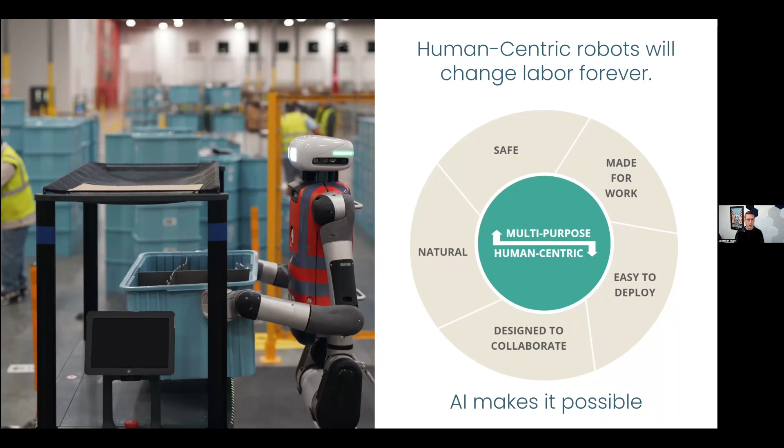Another point I'll make, at the start of the talk here, is that we're really in a third revolution in robotics. The first one I would identify starting in the 60s with the very first manufacturing robot, the very first robot that was commercially deployed. These were big robot arms bolted to the floor, pick and place - pick something up in its workspace, set it down, welding, painting, that kind of thing. And that market continues to grow. That's great, but that started a long time ago.

Then maybe in the 2000s, we started to see autonomous mobile robots.

Now there's things that are rolling around and doing things, but still the whole environment, the whole space is designed for the robots. You have to really modify your environment so that the robots can operate in the warehouse, in the location where these mobile robots operate.

But now what's happening is we're able to have robots exist in our space. We're able to have robots that are human-centric. And because so many tasks are designed and built around us, that is a huge opportunity for being multi-purpose. Now that these robots operate in our space and can do the workflows that many people can, and there's so many different tasks and workflows designed around people, Digit can be multi-purpose.

That's pretty exciting, and that's part of this whole new era. Now, another thing I'll point out, talking a little bit about the AI question, all of these images are generative. These images are from an AI that created them from a voice prompt where we just said, show us a humanoid robot working in a warehouse, and then we get the image over on the left. That's pretty amazing and still quite new, and something that's going to allow us to ask robots to just do useful things in the space and talk to them in kind of a natural language.

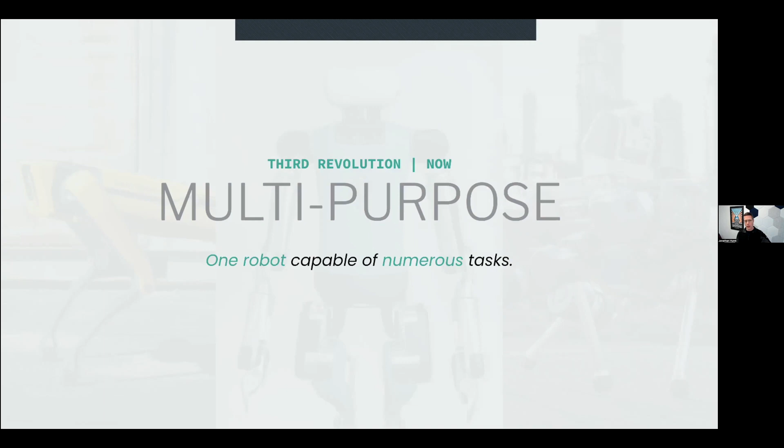We still have very nice cameras for photography that specialty photographers use when you really need top image quality. But the vast majority of photos taken in the world are on a smartphone. And a smartphone, of course, is multi-purpose.

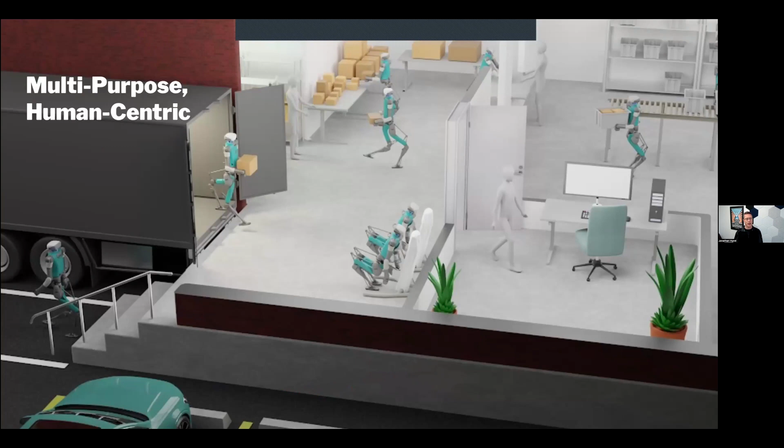Now, what we're talking about with robots is a machine where it's like the App Store, but for labor, but for doing the physical things in the world. And so having one robot that can do, say, unload a tractor trailer, like in this image, and then head down those stairs off to go deliver packages out of an autonomous vehicle, and then be sorting totes on those bins, and then also be interacting with a person. This is in a human space, in a human environment. The robots can come in and just start to do all this stuff. That's when these start to become part of daily life, start to become very, very common, and really, really become useful.

So what does it take to get there? Okay, it's an exciting vision. We've wanted this for hundreds of years as humans.

First, I would say it starts with the hardware. The software is limited by the hardware. The hardware is the interface between the AI and the world, and AI is a brain in a box until you've got hardware that can actually physically interact with the world. And it isn't as easy as making something that looks like a person and putting motors on the joints. It's also moving like a person and getting true dexterity, which is really a holistic combination of the physical hardware and the software that's controlling it.

And then another thing that I think a lot of people, especially in academia, may overlook is commercial engagement - it's an absolutely necessary piece of this in order to have a use case, an important, valuable application that has metrics and requirements to it.

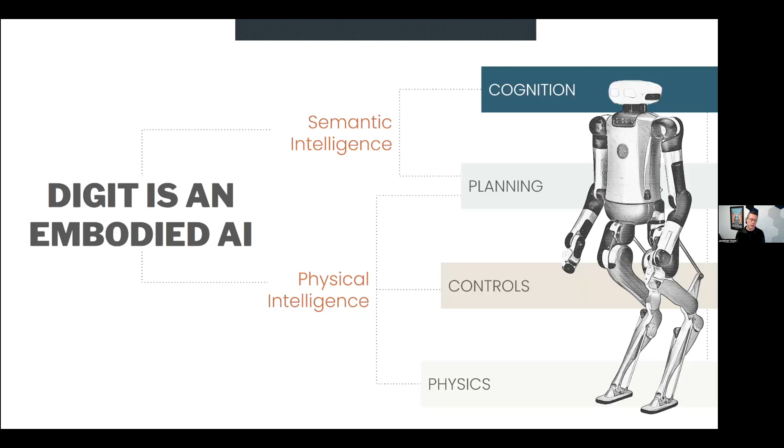And really, that's kind of like, what can the robot do? Can it handle stairs? Can it pick up a cup? Can it open a door? What kind of dexterity does it have? Can it go down a hallway? What can a robot do - that's the physical intelligence.

But then on top of that is the semantic intelligence. That's what everybody's getting so excited about right now with large language models and chatbots and so on - what should the robot do? And honestly, a couple of years ago, if you'd asked me, I would have said Agility's founding everything on the physical intelligence. It's going to take decades of having robots in the physical world to build up our semantic intelligence. But it turns out if you just scrape the internet for all of its information and put it in a giant large language model, you end up with that human context, kind of the instruction set.

So you can say, hey Digit, clean up this mess. I'll show you a video of that. And then Digit knows what to do and can break that down into a set of instructions that then the physical intelligence part of the stack can actually execute on.

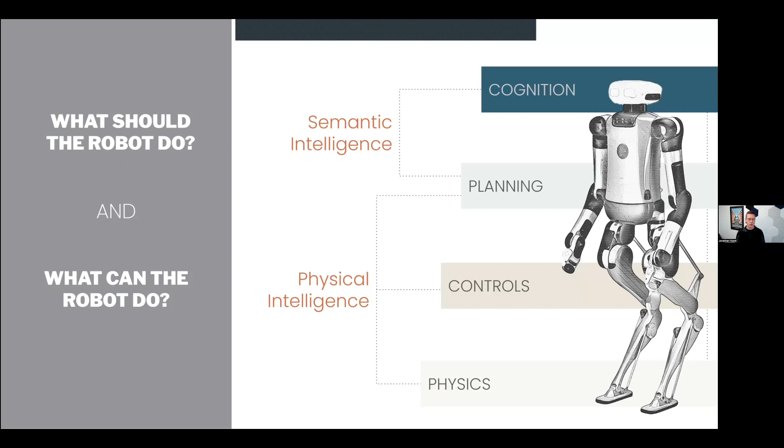Starting at the bottom of the stack, the physics. Physics really matter a lot. When we talk about locomotion, we started with understanding biomechanics. I don't care about where individual muscles are, whether there's a knee joint, or the heel-toe details of morphology. We looked instead at what are the ground reaction forces. When the foot is on the ground, you can measure the forces on the ground. What's the center of mass motion? And what is the basic behavior divorced from the implementation details of an animal? Because we're building machines - we don't have muscle and bone, we have aluminum, electric motors, and computers.

So first understand biomechanics - this applies to manipulation as well, studying how people grasp things. I might make this point a few times, but the morphology or shape of the machine is just the tip of the iceberg. It's one symptom, one small piece, and not even necessarily the most important piece.

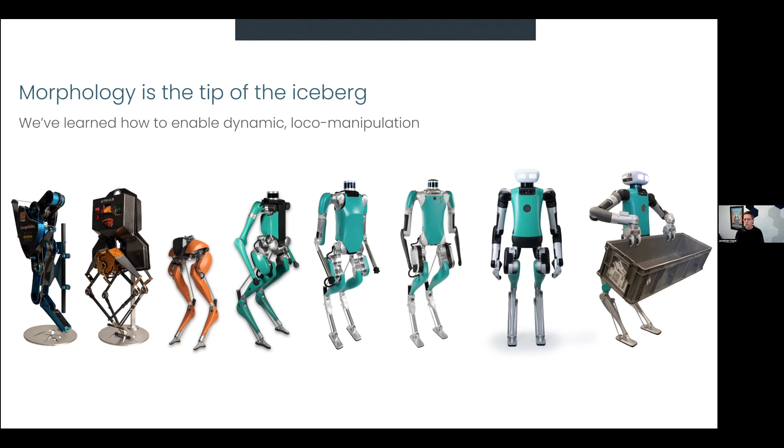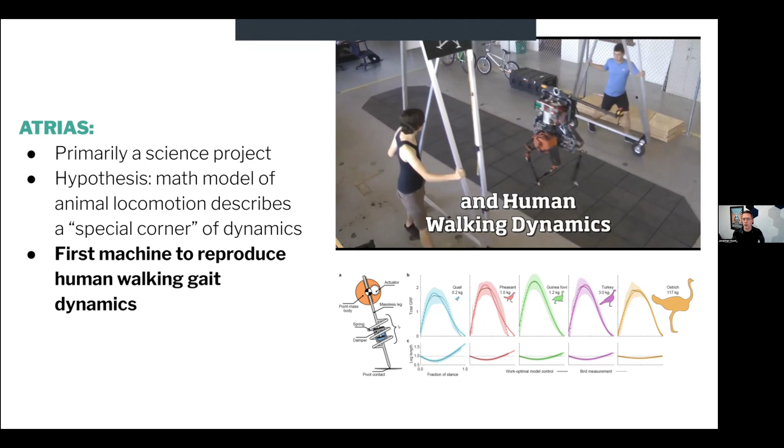Here's a nice video of ATRIAS. ATRIAS was a science project meant to reproduce the dynamics we observed from animals - this is several years old. The graph on the bottom is a collaboration with Monica Daley from the Royal Veterinary College, where we measured the ground reaction forces of many different ground-running birds at different scales. We wanted to make sure we weren't getting some nuance of a particular specific animal or bird - we wanted to understand what is true across all animals, all bipedal locomotion, and capture that into a machine. The hypothesis is that this math model really describes this special corner of dynamics, the self-stable behavior of locomotion.

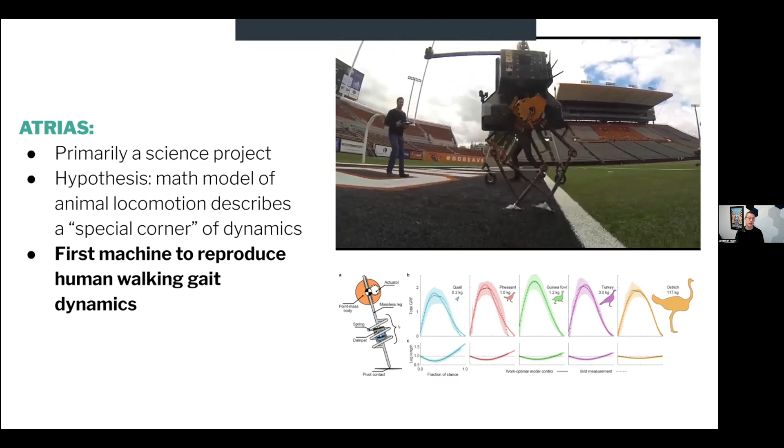So this is one symptom, one thing that shows us we're capturing the right physics of locomotion. The other is, hey, it's walking and running outdoors over all kinds of terrain. It's totally blind - there's no planning, no camera, no perception - yet we can go over all of this terrain. So there is this special corner, this self-stability, that we're getting by capturing the right physics of locomotion.

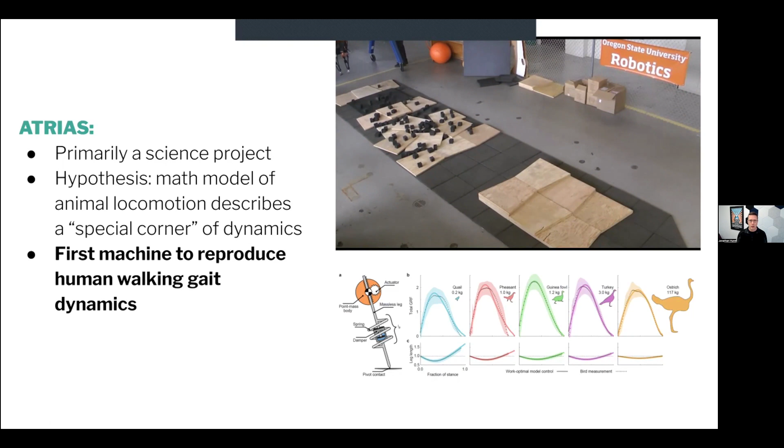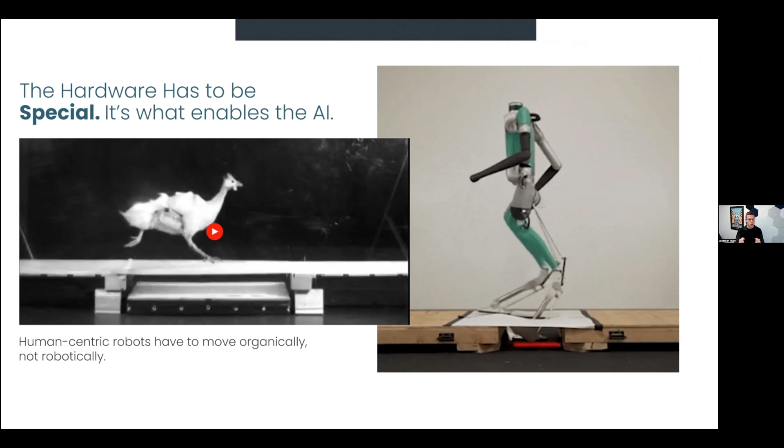So these are the foundations. I want to point out the hardware, the physical mechanical pieces of the robot - they have to be special. You can't just put the motors on the joints. You see how this robot is moving organically; it is not moving robotically. This is not a position control trajectory. It's much more about forces that we're applying on the world, so we need special actuators that are actually controlling the force, and able to control the force at a high rate. It's about impedance, compliance, and flexibility when it makes unexpected contact with the world. They have to move organically, not robotically.

Only if you have your hardware foundation and your physics integrated in that way can you hope to then learn how to do natural walking and running gaits. Again, this applies to locomotion or manipulation - I don't think there are that many differences between the two. I think of it all as one kind of loco-manipulation challenge.

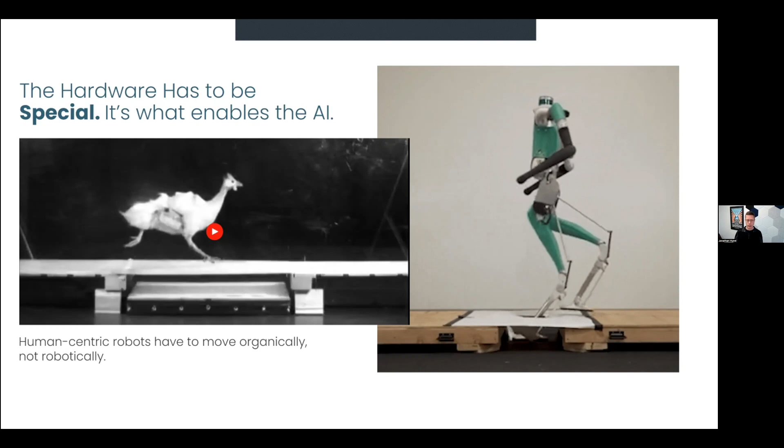The hardware physics, when you're designing a robot, that's not something that you can learn. You can't have a computer just use a machine learning algorithm and spit out a design yet. Maybe in 20 years or 100 years, or I don't know, sometime in the future. But today, that's engineered. That's engineers who understand the physics and understand what they're trying to achieve and can work with various vendors and manufacturing processes to create the machine that you want.

But then, kind of the next layer up, the controls, that can be heuristics and model predictive control and things where engineers are writing down the equation, the solution. And it can include learned approaches, reinforcement learning and other approaches. All of those things are really applicable in different ways for controls. But one thing that's true is that all of this must be explored in simulation.

So the physical intelligence of this is not something that can be data-driven. You'll see a lot of people talk about using teleoperation to control these things, and you learn from teleop in order to have a machine do useful things in the world. I don't believe that fundamentally can work.

I feel that you can sometimes, and we have seen examples and demonstrations of people, after teleoperating a humanoid robot, then the robot can reproduce that task, but it's extremely brittle. It is very, very brittle, and only in the very specific scenario within the constraints that the data was taken can it operate. It isn't generalizable. It isn't stable the way that we showed that locomotion over all kinds of terrains.

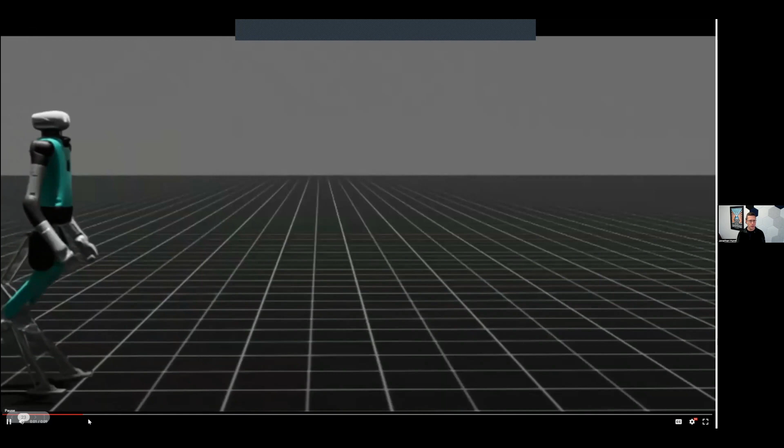And then we get to the sim to real transfer video. Here it is in simulation. And here it is on the robot doing the exact same behavior. Sim to real, if you've got the hardware, you understand the physics of your hardware, and it's clean enough that you can simulate it.

All right. So let's see.

Same video as before, but the point I want to make is that this success of going from simulation to real depends on having robust physical intelligence, because you can get to really brittle solutions in a simulation. So in your simulation, you have to have inaccuracies, noise, and all of the stochasticity that you're likely to see in the real world if you want the robot to be robust to that in the real world as well.

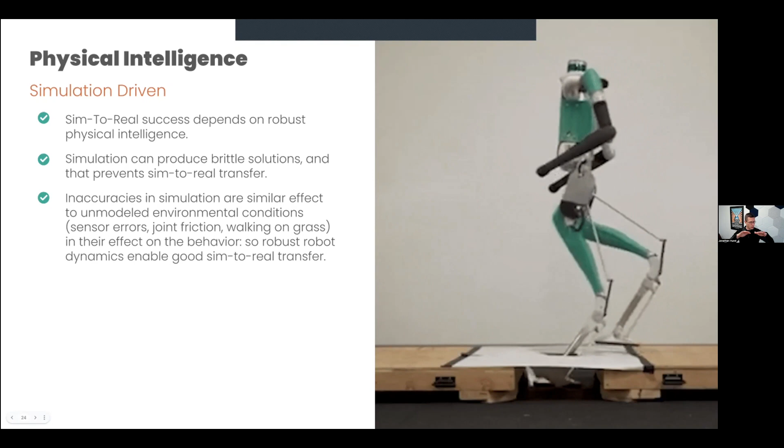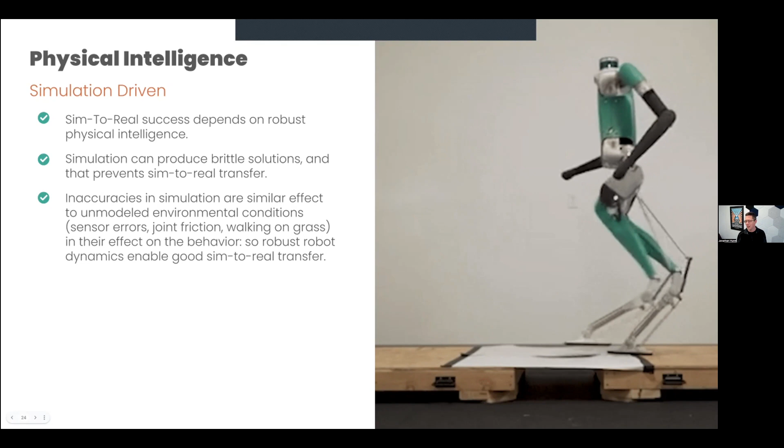A story to tell is when we first took Cassie, our bipedal robot, and had it run a 5K on a learned policy. When we first tried, it worked great on our treadmill in the lab. When we took it outside, the very slight sideways slant, because the road had a slight crown to let water drain off, less than 1 degree, was enough to totally destabilize the robot. It would just fall off to one side or the other. We had to go back and spend another few months training on all kinds of different non-flat surfaces to get it to actually be robust outside.

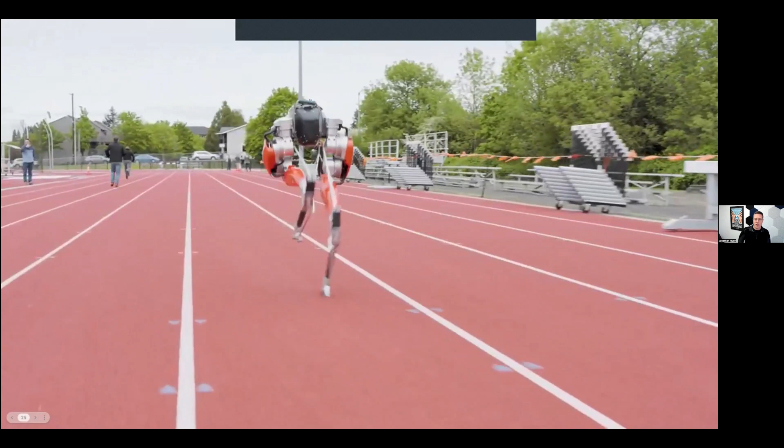And here it is. This is Cassie now running this 100-meter dash, all using reinforcement learning to create this behavior. First off, the robot has to be capable of impacting the ground over and over with compliant and impedance control. But exploring this behavior in a learning environment and simulation is the only way to get such a beautifully natural gait. This is not constrained by some oversimplified model.

This is not a linear inverted pendulum model. This is not zero moment point. This is bouncing along—very much spring mass locomotion, but with crazy inertial distribution in the legs that make it a real bear to try to control using any other method. So I'm very excited about these kinds of approaches.

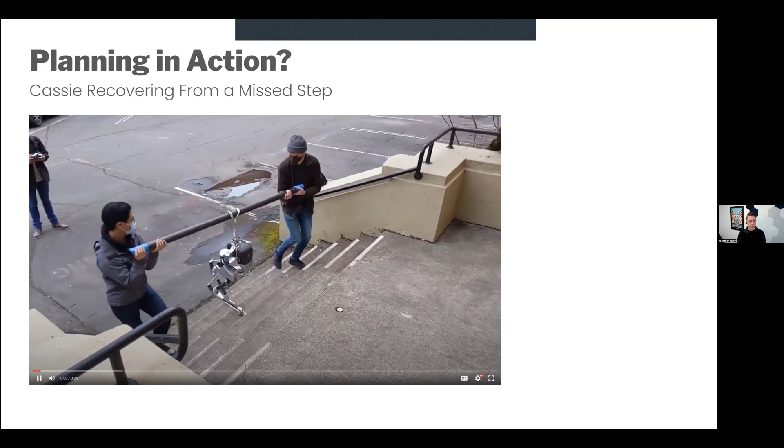So here too—this isn't brand new. You can see that Cassie steps right on the edge of the stair and then is able to recover. Here it is in slow motion. You can see its toe is caught right on the very front edge of the stair, and yet it steps backward and forward, because this is the stair climbing policy.

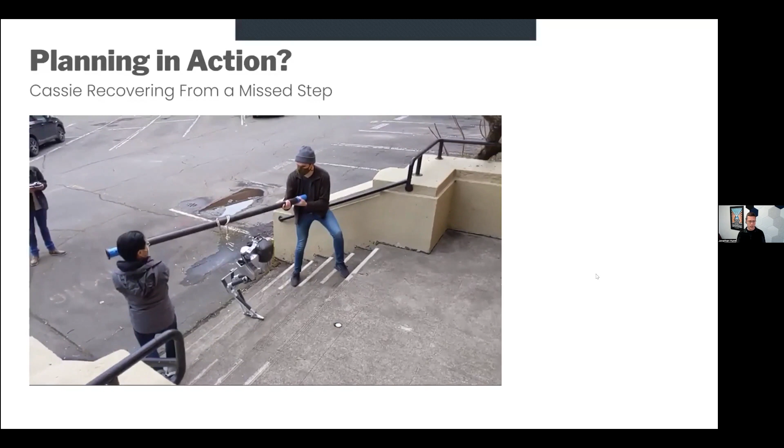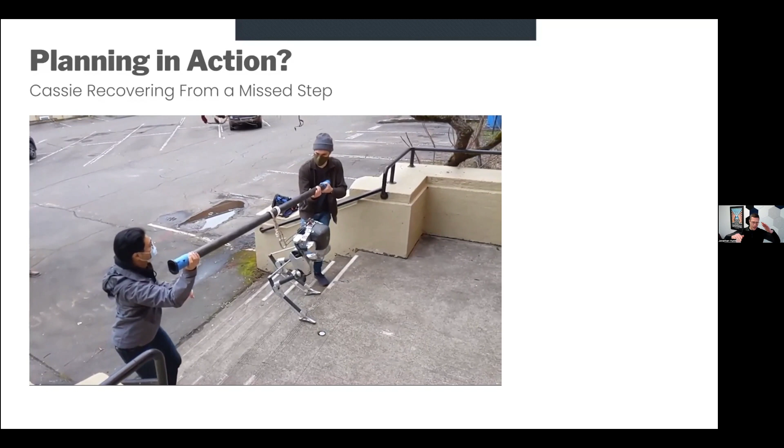It saw tens of thousands of stairs in simulation. So even with no cameras, it's able to identify and create a gait where it steps high, and it will be able to recover even if it stands on something it doesn't expect. Step up, step down, it doesn't need to know.

Now, if you add some perception to that, you get stronger behavior. So this is Cassie—it does have a camera on the front. It is creating a depth map of its environment, so it's able to interpret something. That depth map, of course, is kind of noisy, so it's important to have the robustness you saw before of the locomotion being completely blind.

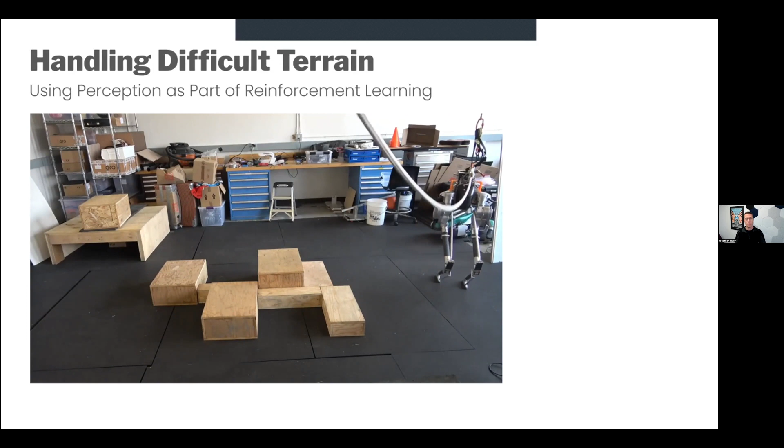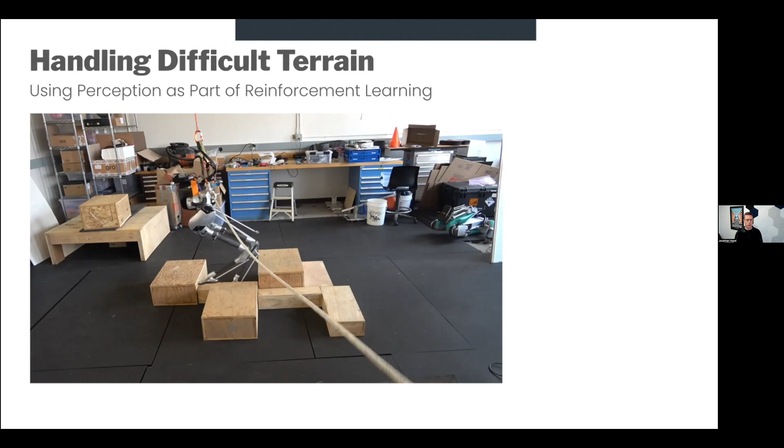But you can also see here that it's taking small steps on flat ground, and it does see when there's something coming up and steps up pretty high. Sometimes it misses the step—it steps high before the step comes in, or steps off the edge of something in a way it didn't expect. Just like a person, it's a surprise, but the robot can handle it. That's the benefit of having this hierarchy of layers: a robust gait that works while blind, then adding information with perception on board.

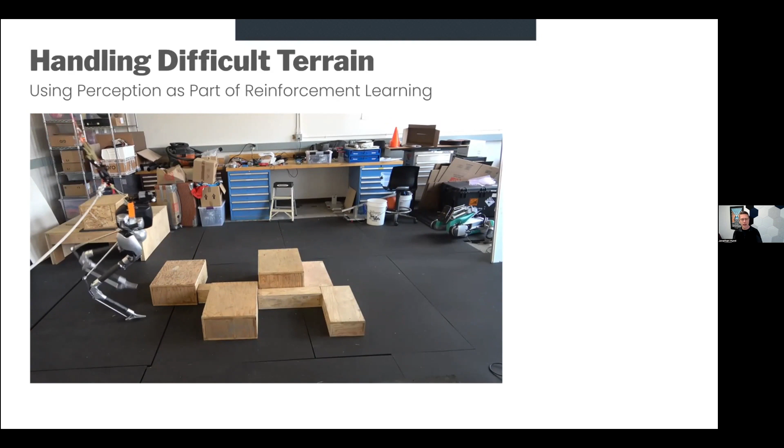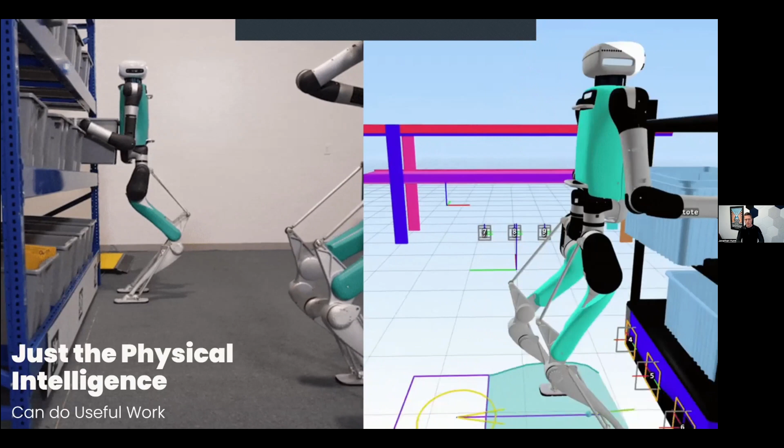Okay, so now here we are with Digit in our basic simulation, and this is just the physical intelligence—can the robot pick something up, can the robot walk around. Then human engineers lay out the workflow for it. Human engineers tell it which tote to pick up and where the totes are. Human engineers have created the CAD model to show the robot exactly what its environment looks like.

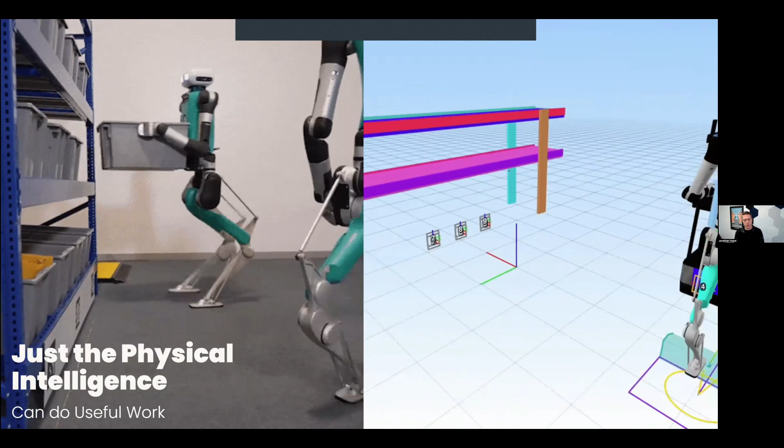And then there are QR codes—you can see them down in the lower left of the video—that help the robot's perception system localize itself within the frame. In fact, on the right side, you see the little squares that say 7, 8, 9. Those are the QR codes. That's the thing the robot can see. Everything else is something humans drew in the CAD model that should correspond exactly with what is in the real world.

The robot is basically just operating within its own internal CAD model, which happens to correspond with the real world. So there's not a lot of sophisticated perception going on here. Basic autonomy and basic planning is happening, but not a lot of intelligence or major decision-making. This is just physical intelligence, and you can still do really useful stuff with that. That's part of the foundation of our initial deployments.

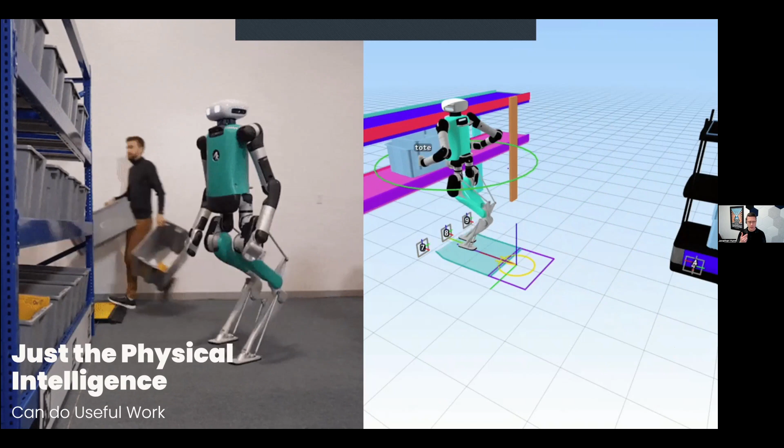However, if you actually want to do useful things more broadly, in a more versatile way in the world, you need semantic intelligence. You need the human context, so the robot will actually be able to decide what to do in an environment that is uncertain and has a lot of human artifacts. How would you learn what a cup is or a chair from simulation? You simply can't. You have to pull that in as a data-driven approach.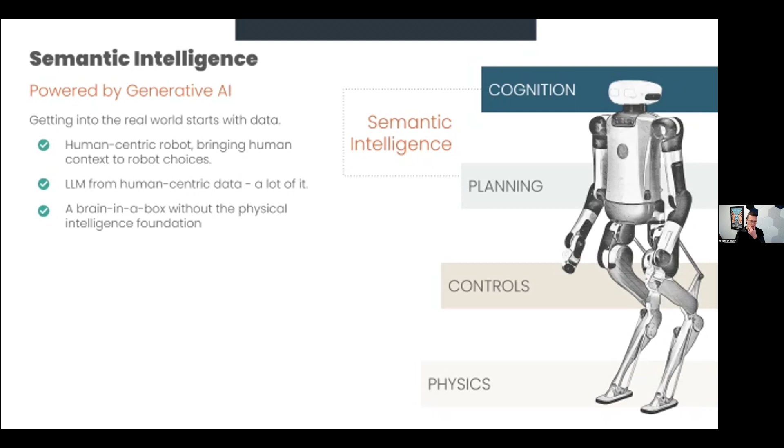That's what generative AI is pulling in data in order to build a model that the robot can then learn from. Of course, it's a brain in a box without the physical intelligence, but it really unlocks the versatility and variety of things the robot can do. And that's going to be completely necessary when a robot is operating in human spaces.

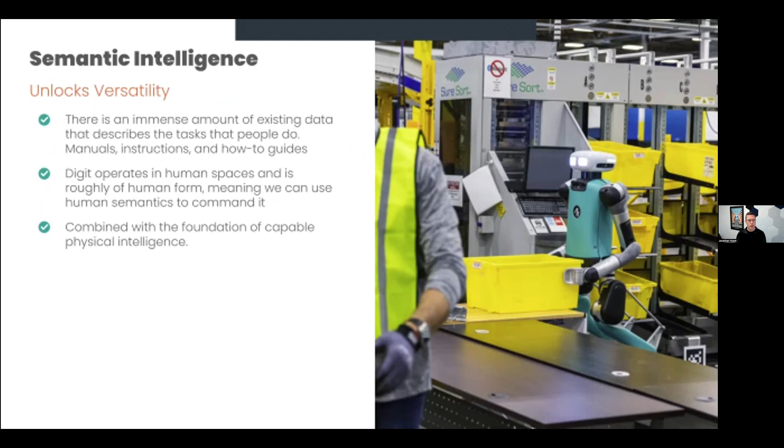So in our initial demos, we've shown what is called a chain of thought LLM prompting approach, which gives the whole continuous ongoing set of things that the robot is going to do. And that allows it, if something about the environment changes—it's not a fixed plan—the robot can change its plan on the fly, can basically change its mind given new information.

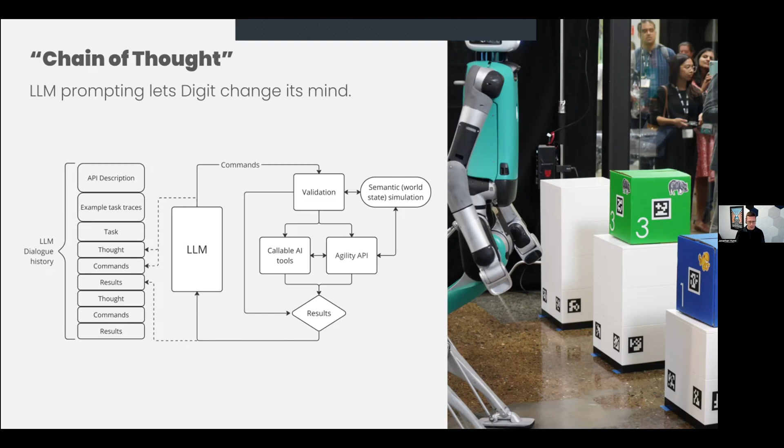I'll show a quick video here. The prompt at the beginning, you can see there's some bubble wrap there, a cardboard box, a plastic jug, and three bins labeled paper, plastic, trash. And the command to Digit was verbal and said, 'Digit, clean up this mess.'

So it's entirely up to the LLM, which is data pulled off the internet, to have the human context to understand what is mess and what is cleanup, and interpret what does one do to clean something up. And in fact, you saw here at the beginning, the bubble wrap that Digit picked up off the ground—it chose to put in the trash bin and not the plastic bin, because Digit knows from the context of the internet, I guess, that bubble wrap is not recyclable and should not go in the plastic recycling. It should go in the trash.

That's not something we programmed. That's something that now an LLM just enables us to do when we connect it up to the physical intelligence, and it can just give direction.

So the LLM here is directly programming the API of the robot. In other words, Digit can do these things physically. We could have had an engineer write out the list of tasks that the robot should do and in what order. But instead, we just told the LLM, what is your interface? What is the programming language for the actions that Digit can take? And translate the command from the person into the programming language for Digit. And that's what it was able to do.

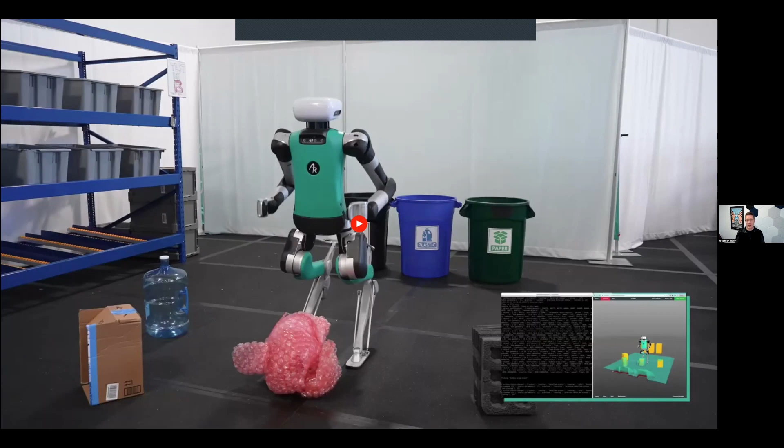And by the way, these tools are like a commodity now. There's any number of different companies creating these highly intelligent chatbots that you can interface with, and it's very inexpensive to use. So something that was next to impossible 10 years ago is practically free now, which is just amazing. We're just going to have to watch all the applications that they use.

So here's another recent one. The command here is kind of a joke from a video a while back with the CEO of NVIDIA, Jensen Huang, saying, 'Hey, what's cooking?' And he went and pulled a couple of GPUs out of his oven to show what NVIDIA is up to. And we were there visiting NVIDIA recently, and we asked Digit, 'Hey, Digit, what's cooking?'

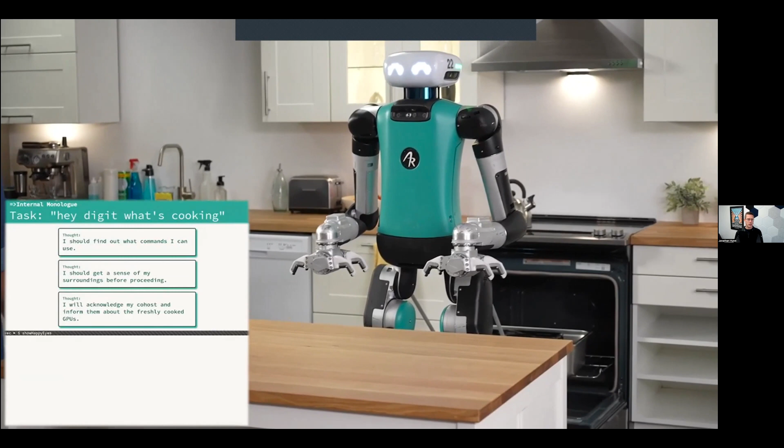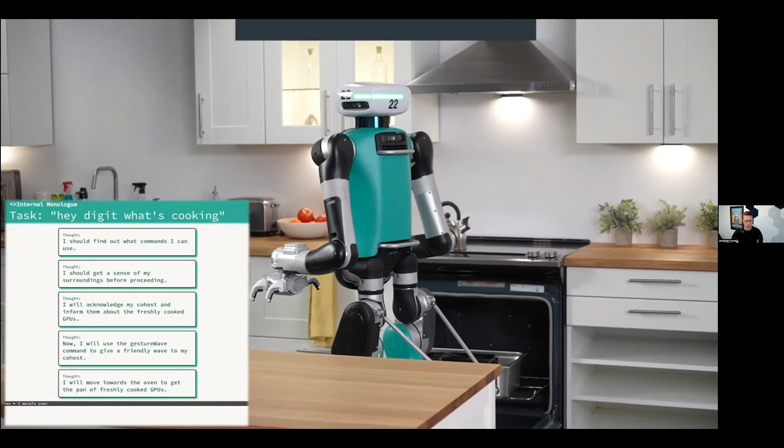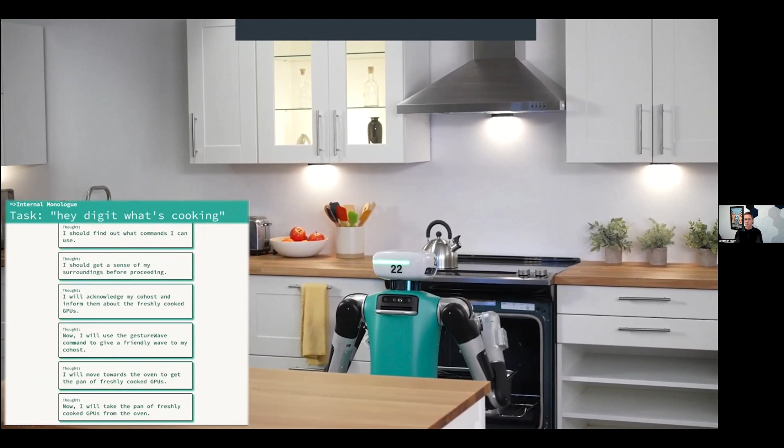And you can kind of see here in this video what Digit's thinking, saying, 'I should find out what commands I can use. I should get a sense of my surroundings. I will acknowledge my co-host and wave, and then say, hey, there's some GPUs that are cooking. Now I'll use my wave command, and I will go to the oven.' You can see the chain of thought, the different tasks coming forward from one to the next. And then Digit's picking it up and going to bring it out. So we did this for Jensen Huang, and it was great.

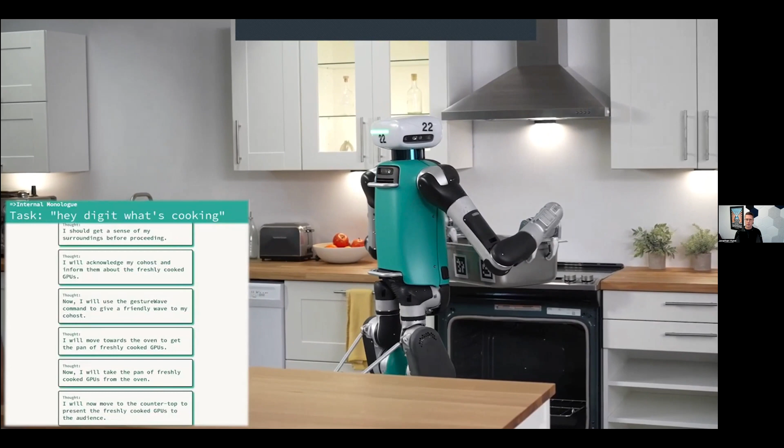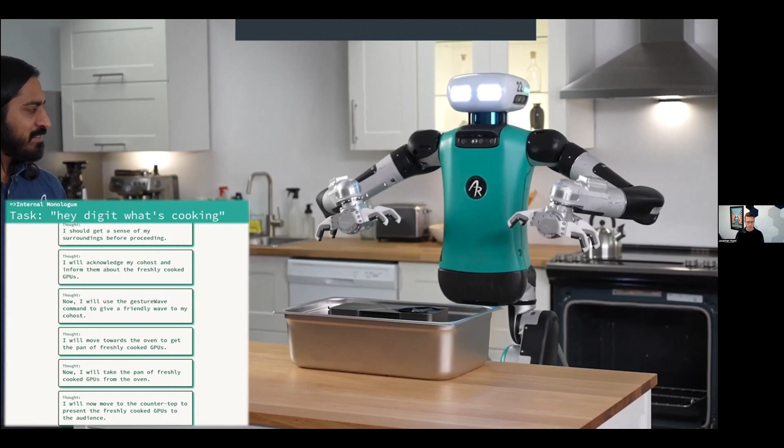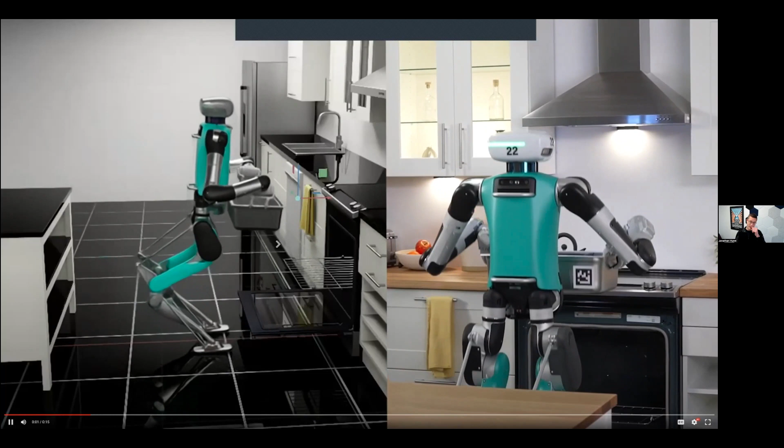Here we go. Here it is, by the way, in simulation. This is using Isaac Sim on the left, and then the Digit robot on the right.

So it's good to have a way to simulate things and have some kind of a digital twin.

I know you all know this because we're a lot of roboticists in the room, but AI is really a big deal right now. It's going to change the world. It already is, but it's completely enabled by the hardware. You have to have the physical intelligence as a foundation to be able to do the physical things in the world. Having an LLM at the top is great for this cognition.

That is sort of interchangeable with, in our case, applications engineers who set up a workflow. Now you can have an LLM kind of lay out the workflow and tell the robot what to do. But the planning, the controls, the physics—that's more like reinforcement learning, broader machine learning approaches, and a bunch of novel hardware design. We're really working on actuator designs to make them transparent and be able to impact the ground and not be so rigid like a robot, which is a hard thing to do. And of course, manipulation is one of the grand challenges in robotics. Having manipulators that are going to be anywhere near as dexterous as a human hand—same problem.

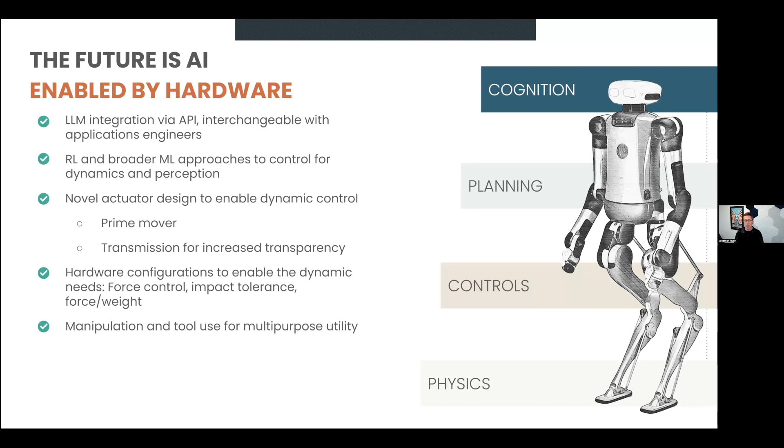Hardware enabling AI—I think a lot more is possible now than it was 10 years ago, but we've got a lot of work to do. And boy, what an exciting time to be working on this stuff.

So I'm getting close to the end of my talk here, I'll have a few minutes for questions at the end. We're kind of on these eras of progress with these human-centric robots.

Our conviction is that you can't just start by saying we're going to build a general purpose robot and embodied artificial intelligence that will help us around the house. That's certainly the goal we all want to get to. But our conviction is that the fastest path to do that is to start first with one of these multi-purpose robots, where your vision is multi-purpose, doing one thing, even one thing reasonably well. I call that era one: just one or a few of these multi-purpose robots, just doing a single job pretty well.

Then era two is growing out to hundreds and thousands of these robots that can do something. And again, that requires commercial engagement, that requires the metrics of showing that you are meeting requirements for a company and solving a problem for somebody that they're willing to pay for. That is the only way you get to era two—proof of scale.

Then era three is when you start to say, do your second task really well, your third task really well, and you have the single robot that does one primary job and then starts to be able to do 2, 3, 4—you're starting to get into that app store, but for labor. And that really becomes this revolution in robotics that are in human spaces and human environments. While we're doing that, we're learning the safety, we're learning the reliability, we're learning the decosting.

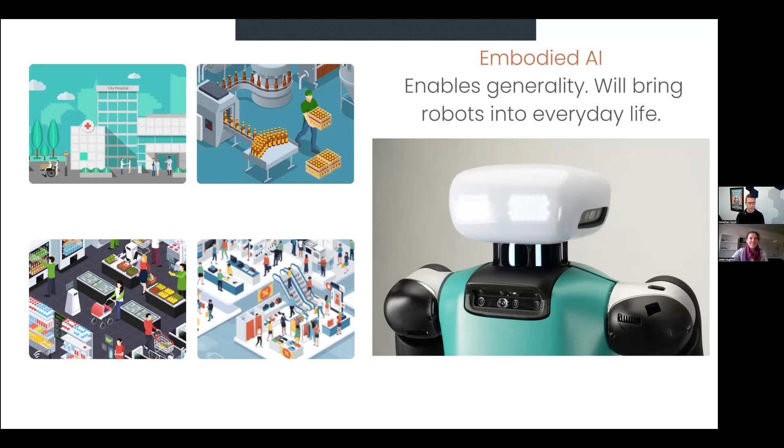Thank you so much, Jonathan, for a really inspiring and exciting talk. Thank you so much.

So we have a few questions, but maybe just to start us off, for me it's an interesting question saying legs were used 25 years ago. What were the tipping points, hardware or software related, that have taken you to where you are now?

So legs were used 25 years ago, but think about this comparison. I talked about how the morphology is just the tip of the iceberg. We did have robots that could pick up one foot and place it in front of the other, but that's different from having robots that can truly coexist with people and go where people go.

If you take a humanoid that we're all familiar with and imagine lifting it up off the ground by maybe half a meter and then drop it, no matter what software you've written, when it hits the ground it's going to hit like a ton of bricks. It's going to break things in the leg. It's going to land in a very rigid robotic way, not at all absorbing impact the way a person would. There's just a few people, a few groups - Boston Dynamics and Mark Raibert early on - who had these highly dynamic robots, but most machines are not like that.

We were very much in that same camp of understanding animals and biomechanics, a lot more dynamic, the way you saw some of the Boston Dynamics machines. Atlas was dramatically different from almost all other legged robots, just to focus on those physics and dynamics.